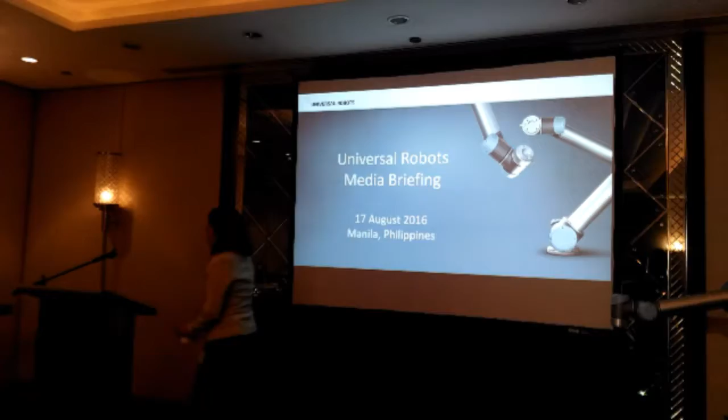For my presentation today, I will be telling the story and the journey of Universal Robots. I will be sharing with you our products, revealing our strategy for the Philippines, and last but not least, I will share with you a case study as well as a robot demo.

So how did it all start for Universal Robots? Universal Robots was founded in 2005 by 3 Danish students while doing their PhD at the University of Southern Denmark. At that time, they were working on finding the best automation solution for the food industry, and they found out that to put pepperonis on pizzas, you will have to use robots of about 150 kilograms placed on Euro pallets and drive them around to do that.

They also discovered that the robotics market was dominated by very large, difficult to program, heavy, expensive, and unsafe robots, whereby you need fences to put in place to work with people. So this was where the whole idea of making robot technology came about. These 3 founders believed that industrial robots should be made available to everyone, easy to program, safe for people to work side by side with, and accessible not only to large companies but also small, medium-sized companies.

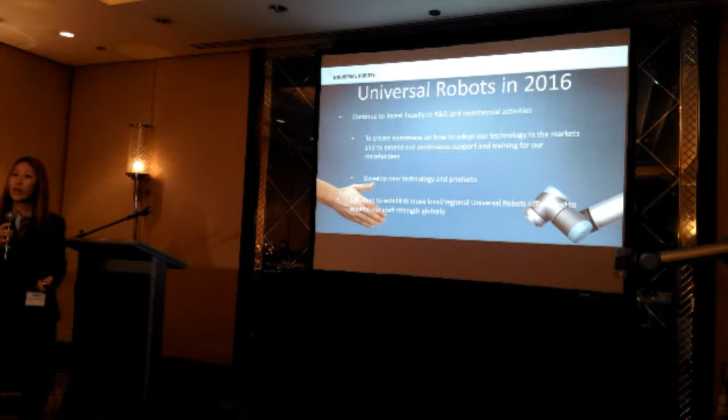So what's going to happen for us in 2016? Universal Robots has experienced very great growth in the many years that we supplied our collaborative industrial robots to the markets. So we will continue to invest heavily in research and development so as to bring new technologies and products to the market. We will also continue to invest heavily in commercial activities so that we support our stakeholders to support the users in the market.

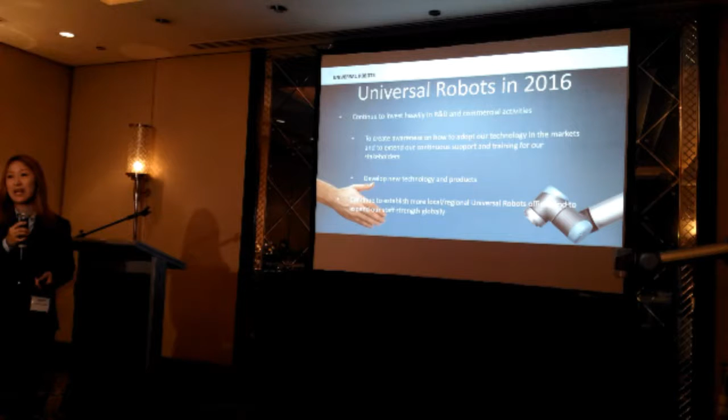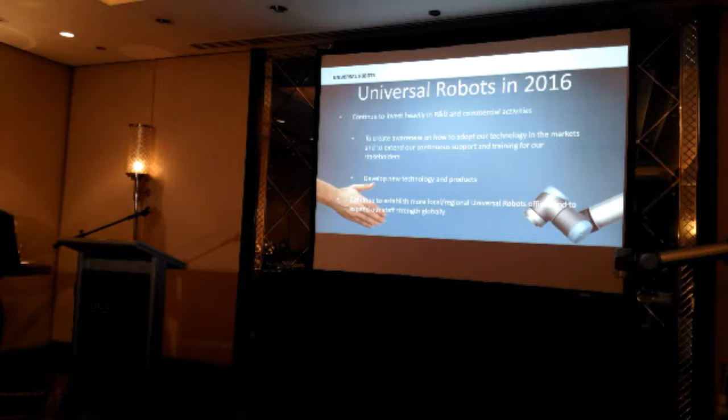We also want to ensure that we create awareness on how to adopt our technology in the markets. We also will continue to add more local and regional offices, and we will expand our staff strength globally. Currently we have about 300 employees globally.

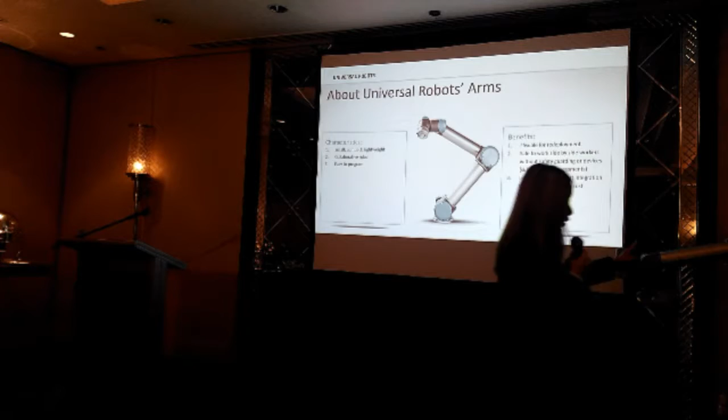I'd like to share with you the unique benefits and features that our robots bring to users in the market. There are many features, but I want to list out 3 important areas. The first is small, lightweight, and compact, which gives great flexibility to users in the market. Our UR5 here has a maximum payload of 5 kilograms, and the arm itself weighs only 18 kilograms, so it has a very good ratio to the payload it can lift.

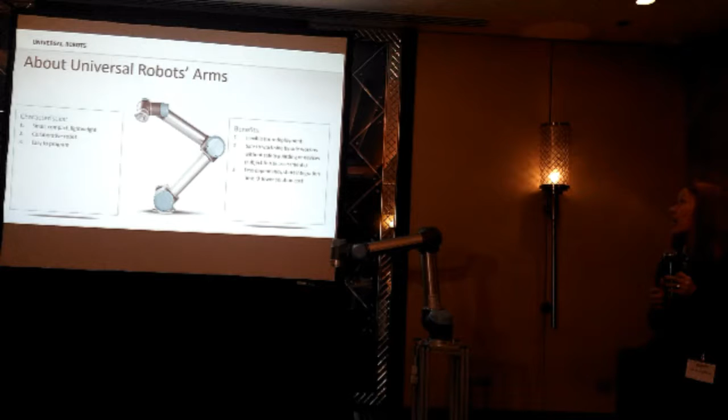There are 3 main areas of benefits. First, for small, medium-sized companies who produce small batches—high mix, low volume production—it's ideal for them to adopt automation now because they have the possibility to do so with Universal Robots. They can move the robots around and redeploy them to other manufacturing lines they have.

Also for seasonal productions, even companies that are very large may produce products for the winter season for half a year, then not produce again for half a year. Now they have the chance to redeploy the robots to the summer line production. Also, for very large companies with a short product life cycle, meaning they need to come up with new products all the time, they now have the option of redeploying their equipment and technology to suit manufacturing landscape changes as they continue their business.

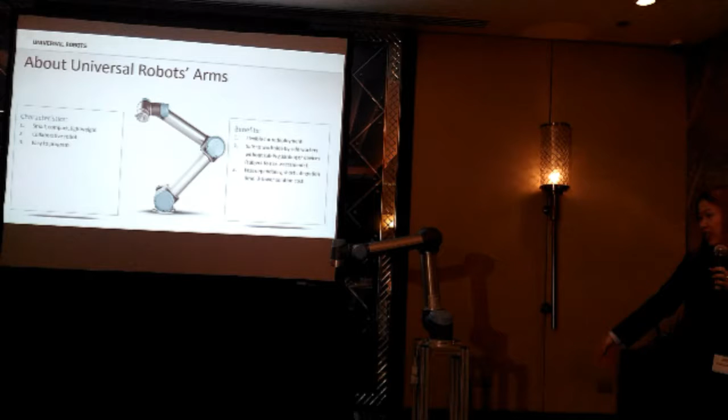The second area is that you basically do not need to change the existing production layout. You can see the footprint is very tiny—just 4 bolts is what you need to tighten the robot down. So you don't have to start finding space or changing the layout of the production, which would increase cost and be a great hassle to the manufacturers.

Thirdly, it can now automate processes which the large traditional industrial robots cannot, because the large ones cannot go into the tight spaces that Universal Robots can. So these are the 3 main areas about the flexibility benefits that we can bring to users.

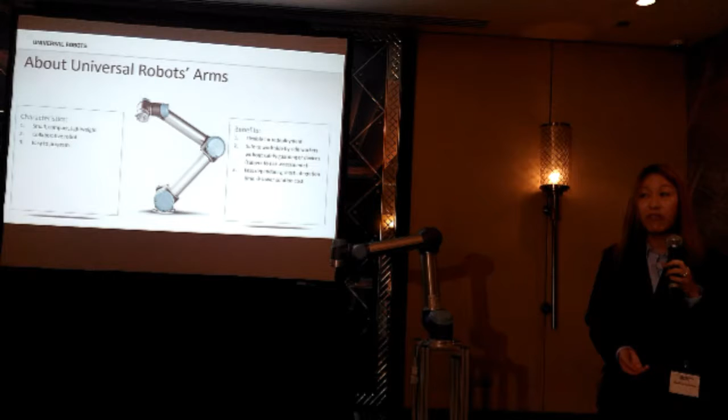The second characteristic our robots have is that they are collaborative class industrial robots. This means that when the robot meets a collision, it will stop automatically. This also means it is safe for the robots to work side by side with workers without safety fencing or safety devices, which again would increase cost for manufacturers. This is possible because we have a patented technology which measures the electric current and stops the robot automatically.

The other part of it is due to the adjustable safety system in our robots, which can restrict force, momentum, speed and power of the robot. It can also restrict the workspace so that when the robot extends outside a certain boundary, it will slow down. So you can create a very safe program for users in the market.

Thirdly, our robots are very easy to program—much easier compared to traditional industrial robots in the market. The idea here is to put automation back into the hands of the operator. We want users to be self-sustainable and independent in their own manufacturing processes so that they have full control over it. Now their engineers can learn how to operate the machines and deploy solutions in their manufacturing facilities.

This means at the end of the day, it has a lower cost for manufacturers. Also, with a very short integration time needed to deploy a solution, the cost of integration is 30 to 40% lesser than with traditional industrial robots.

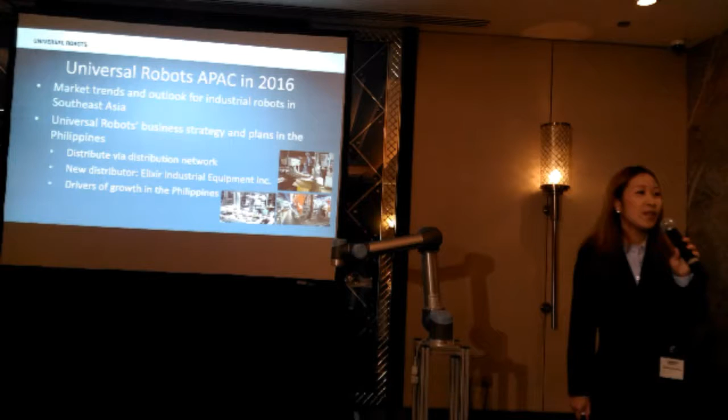So what's next for Universal Robots APAC in 2016? We will be further separating the Asia Pacific region because we have grown to a size that is so huge. We will have a region called Northeast Asia and Southeast Asia plus Oceania. That is the direction we are going for 2016.

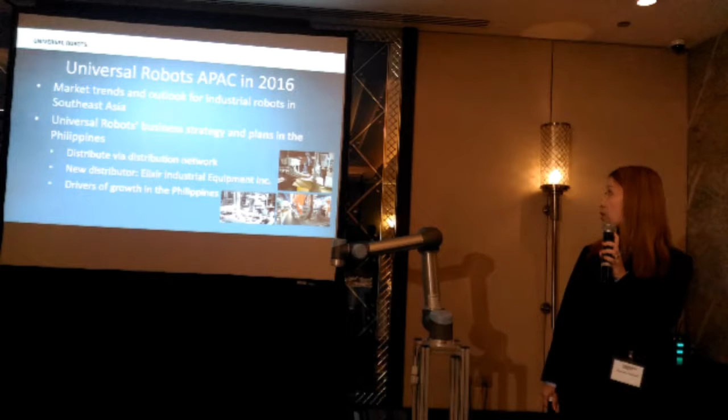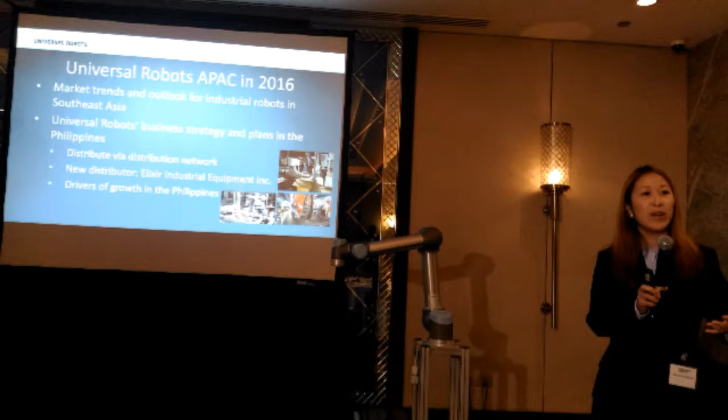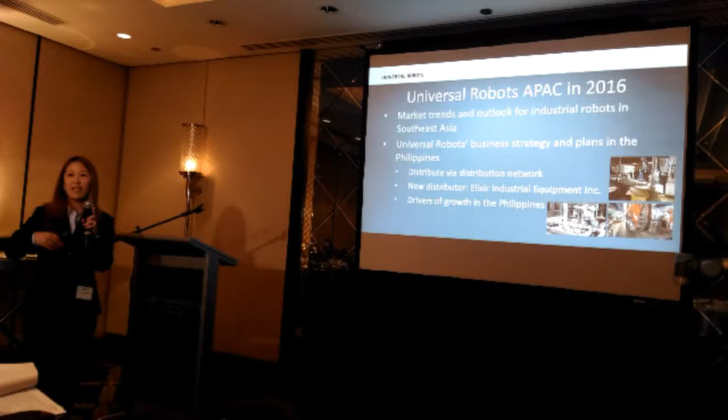We have noted that the interest and willingness to adopt automation, particularly collaborative industrial robots or applications, is on the rise. In 2012, when we started establishing our distribution network in this region, collaborative industrial robot applications were unheard of, and there was a need for great education to explain to the market what this is all about and what it means for users.

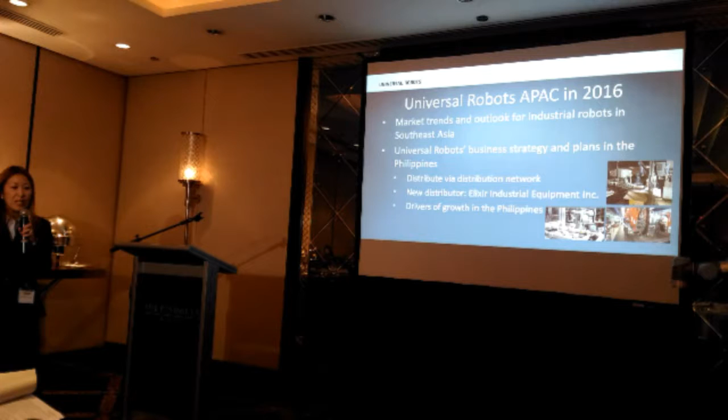But now we have seen that markets like Thailand have tripled their sales in the past 3 years. We have seen countries like Vietnam and Philippines with inquiries coming in. Singapore is actually one of the top 3 markets in our region. So considering these countries in Southeast Asia, we are already seeing a high adoption rate, and we believe that with the challenges manufacturers face in this region, this is going to be on the rise.

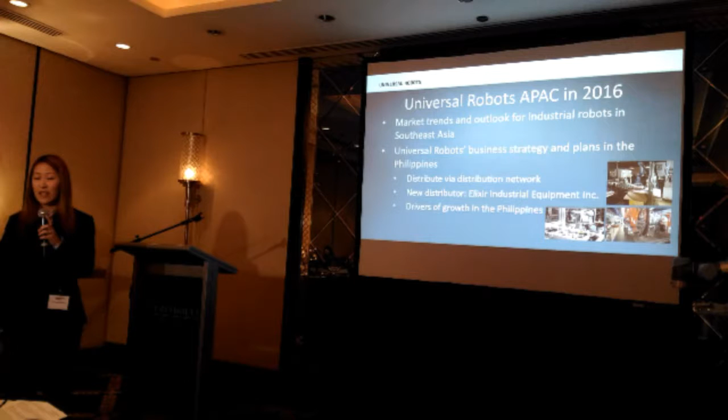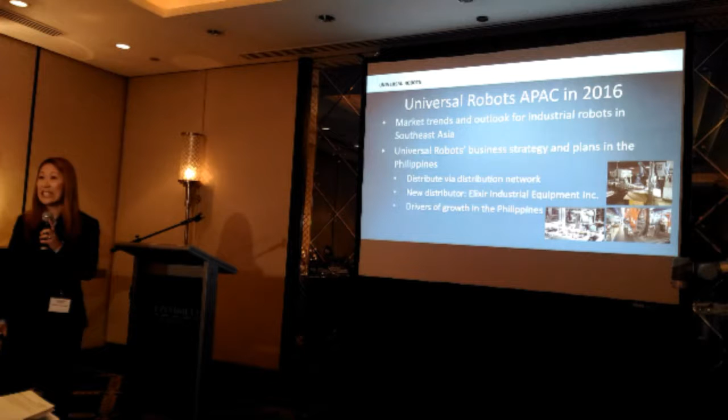Our strategy will still be very much the same - we will continue distributing via a distribution network. We will continue to ensure that in the Philippines the potential in the market is well covered with a strong network of distributors. We have, with great pleasure, partnered with Elixir Industrial Equipment about a couple of months back, and we have already seen sales happening - we have users in the market already.

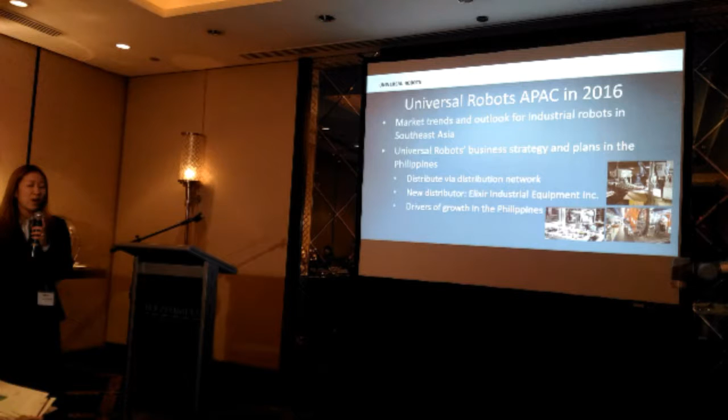We also believe there will be key drivers to the growth of the Philippines market, mainly because of the huge manufacturing industrial presence here - many different sectors such as electronics, semicon, automotive, pharma, and food and beverage. We have also seen that manufacturers in the Philippines are very receptive to automating their plants, which is also a strong sign.

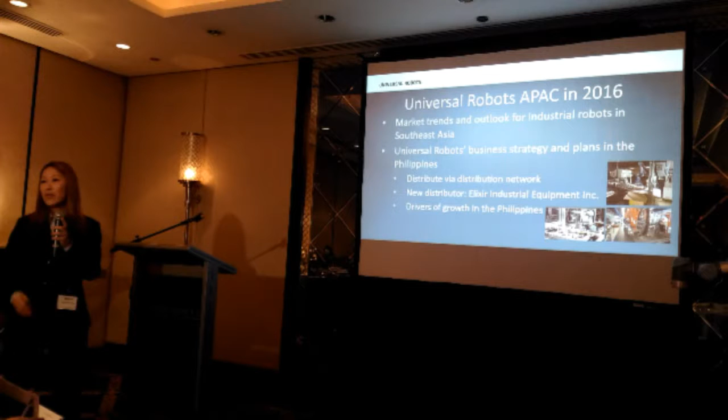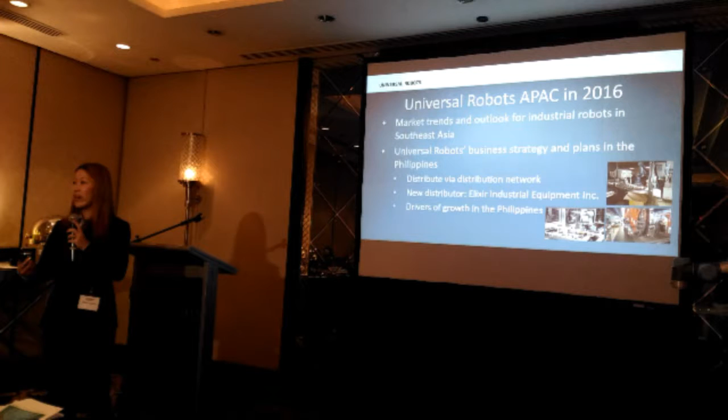We also understand that the government has a strong focus to support small and medium-sized companies here to boost productivity, looking at technology and innovation. I think it was announced in the national budget that funds have been set aside for this as well. So it's all positive signs, and we believe this will all drive the growth of our industry in the Philippines.

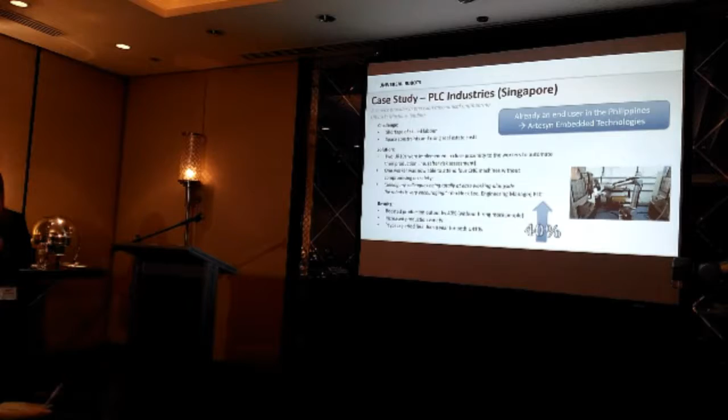Here is a case study I'd like to share with all of you. It's a customer in Singapore, PLC Industries, an SME in the precision engineering industry. The task they look for is machine tending, and the challenge is that they produce up to 80 different products in a month. So as you can hear, with 80 products they need a very flexible solution to automate their processes. They also have a challenge of finding a skilled labor force.

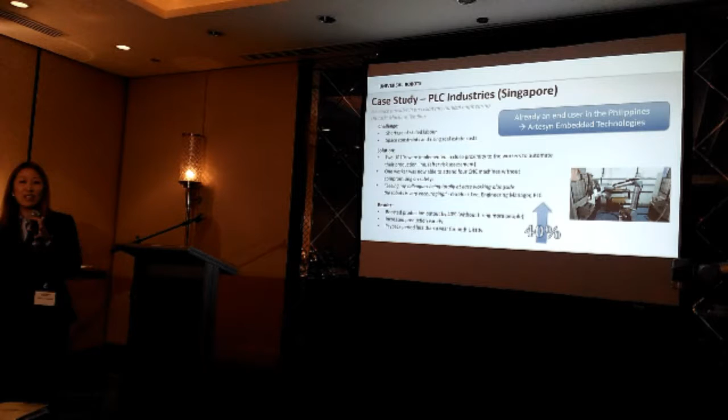That led them to consider Universal Robots because of the unique offerings and benefits we can provide. Two UR10s were implemented, with each robot tending two CNC machines. Because there's no need for safety fencing and the space is very tight, they don't have to move the machines around - they put the robot in between the two machines, and it can reach into both.

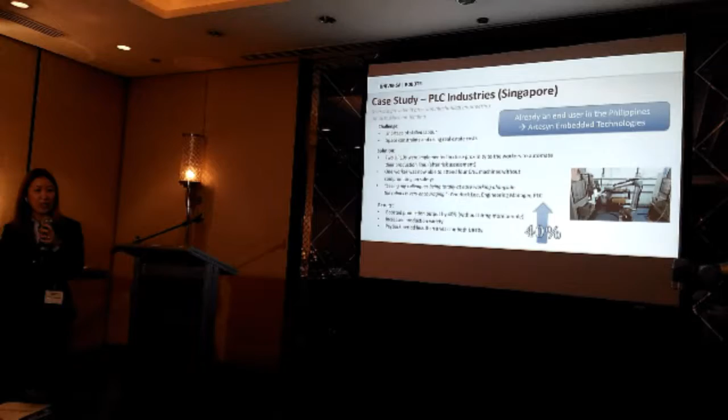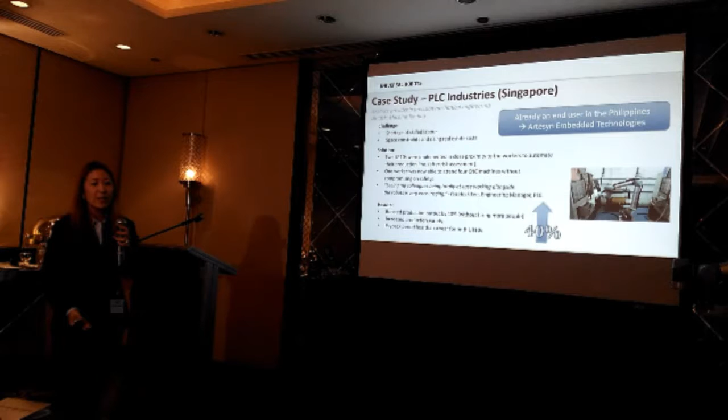This means that instead of one person tending one CNC machine, they can have one person tending 4 CNC machines. This has boosted productivity by 40%. They are also able to continue producing the variety of products they make, and the payback period is less than a year.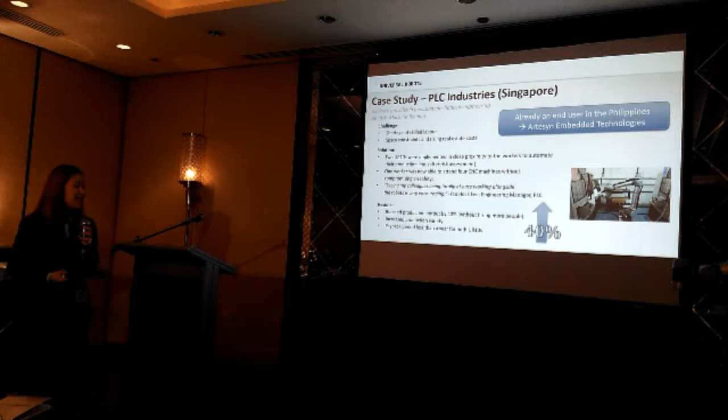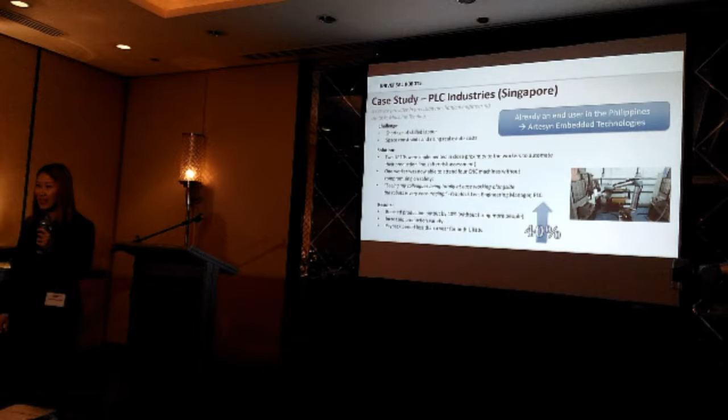One of our first, actually second, users in the Philippines is Artesyn Embedded Technologies. They are in the electronics and semicon industry, and they have about 4 of our robots, all the different models, in their production facility.

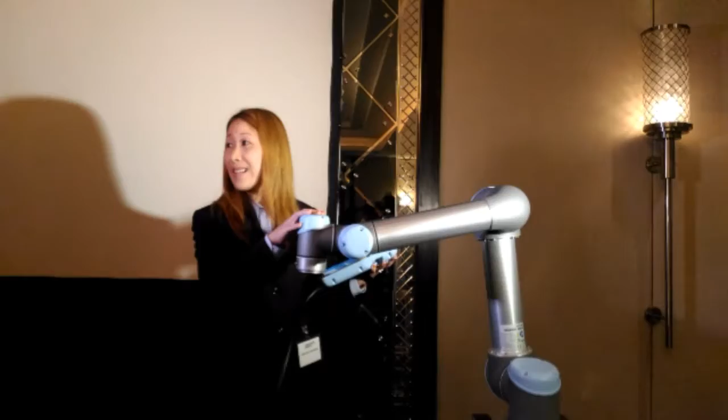This is a 6-axis articulated industrial robot. You can see 6 axes here, and it's modularly designed. Every axis has its own gear, servo motor. The electrical component is all inside the joints.

It's hollow here, so only 4 tubes and cables run through it, and this means there is a very short downtime. If you need to change this out, it's just to take this out and put a new one in - and 4 bolts to fix the robot.

This is the controller box. Some of you may know that the traditional industrial robot's controller box looks like a refrigerator size. This one is only 29 kilos, so a woman can basically carry this unit out, set it up, and bring it down.

Here, this is the teach pendant. I will show you that you can create a very simple program. If you go to an empty program and say, I'd like it to move from point A, B to C and back to A - I'm going to set this waypoint. You can see there are arrows here where I can move the robot to where I want it to be.

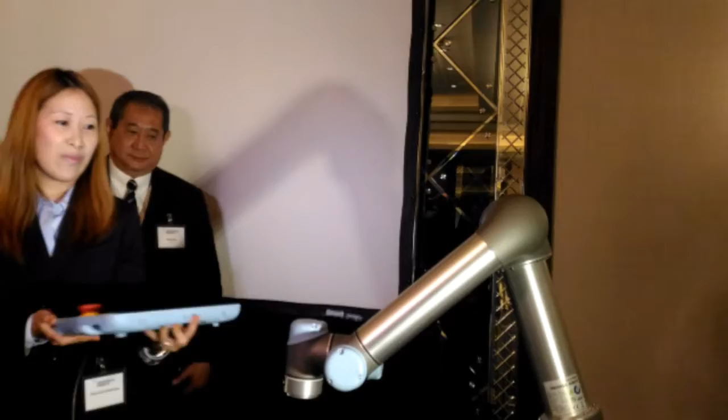So say for example the robot has to pick something up here - okay, you can see it turns green, basically saying that waypoint A has been defined. You can go to B. If you don't want to use this graphic user interface, you can also key in the positions if you know exactly where you want the robot to move into. Or otherwise, you can learn it the very intuitive way - by holding this button down and moving the robot arm to where you want it to be.

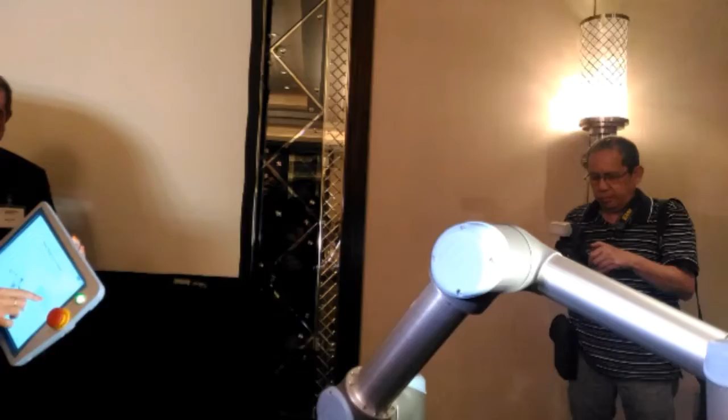Happy with this? Then we will say that it has to bend, do this - and now I have quickly made a 3-waypoint program. This means you can map out the program very quickly on site to see that it works. You can of course adjust the speed up to a higher speed here.

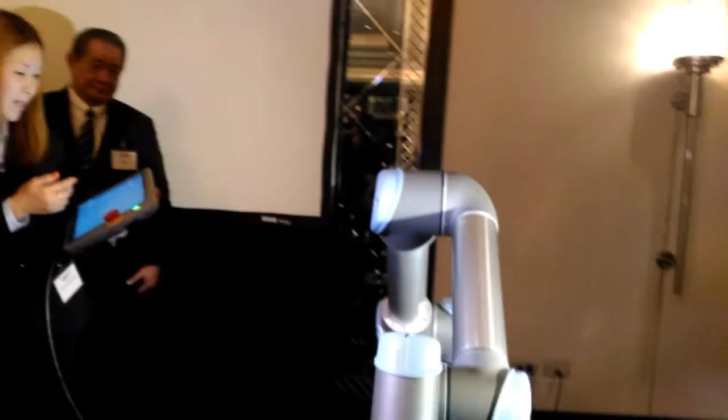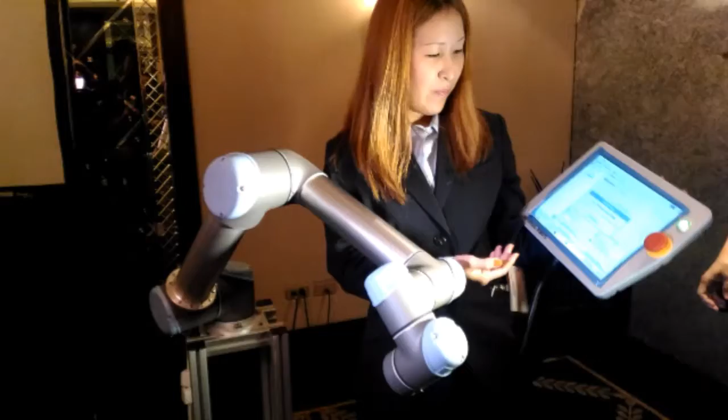You can also adjust the force for the UR3 to as low as 50 newtons. So you can see when it hits me, there's a protective stop and it stops. So I can enable the robot and it will continue.

It's basically very safe to work side by side. And of course, you have to do a risk assessment prior to installation, because if you're carrying a maximum payload, moving at maximum speed and at eye level of the worker, then it just makes common sense to do some protection, fence it up, or do a light curtain to make sure it's safe.

Anyone want to have a go to do the programming? So this is a very short demo to basically highlight how easy and quick you can make the program, and when it hits you, it will stop automatically.

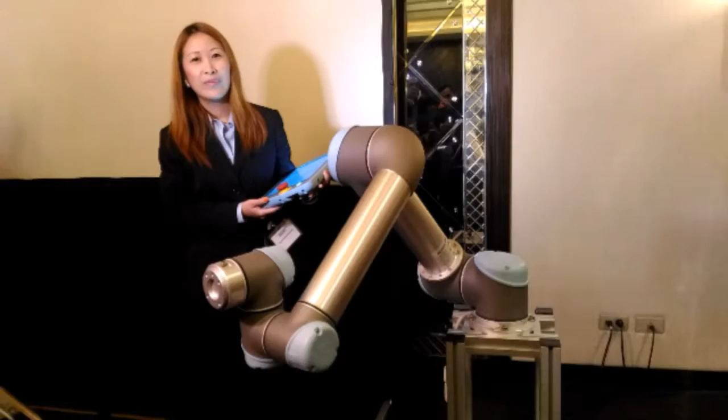So since Elixir is your partner here in the Philippines, if any particular company ordered the universal robot, would they immediately have stocks on hand? Yes, we need to have a very short lead time. In fact, one of the shortest in the market for industrial robots.

And for a low volume, say 1 unit, we have them on stock, and this is to ensure that we have a very fast delivery time to the market. Of course, if you look at a higher volume, then it's typically 2 to 4 weeks. Traditional industrial robots' lead time will easily be between 2 to 4 months. So this is where we also try to be on the edge of the service part of it to the market.

We have a phone-in question - sorry, but she can't make it, she's stuck in traffic. Is Elixir capable of reaching all types of markets, or just focusing on Metro Manila?

They have their own business plans, and they will start somewhere, just like any other business, and then look into reaching out to the different aspects of the market. But as we've observed in many other markets, one partner will find it difficult to cover the entire potential in any one market. So we foresee a strong network of distributors in the Philippines, just like in other countries, to make sure they all complement one another and there are no gaps in the market, because at the end of the day, the users will be our priority.